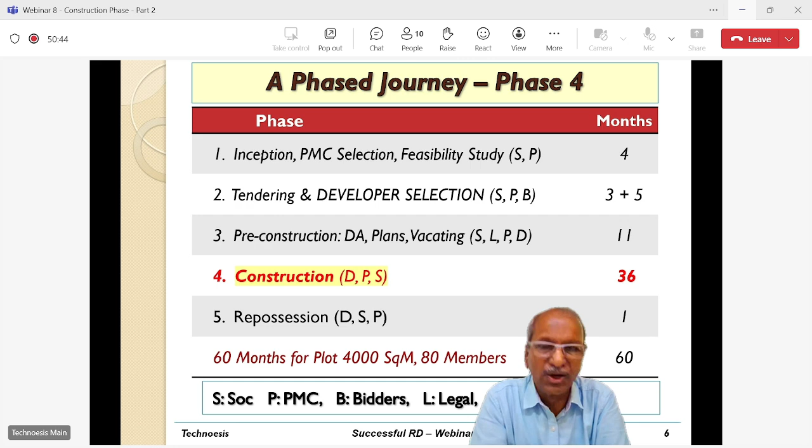When all this is happening, what is important is that documentation also has to keep pace with the construction. That is the aspect of the same construction phase which we are going to discuss today. So we are not going to discuss the action points which we covered in our last webinar, but in this one, what we are going to cover is the documentation part.

So exactly what are we going to cover in this webinar? First is daily data capture. A lot of things happen daily on the site. Typically, the way we at Technoesis provide our services during the construction phase, we have our site engineer permanently stationed at the site throughout the day. What he does is capture the construction-related data happening at the site in our own system - we will see how that is done. This happens daily - it's pure data capture of what is happening where, and in a structured manner, collected in standard forms.

Second is - this was daily - the second type of documentation is when our project coordinator visits the site once a week. When he visits, he sits with our site engineer and also with the developer's representative, especially someone aware of the happenings at the site. In that visit, our project coordinator first checks the data which has been captured by the site engineer since his last visit, then tries to relate it with the expected contractual way in which the building is being constructed, and makes sense of the data in relation to how the construction is happening.

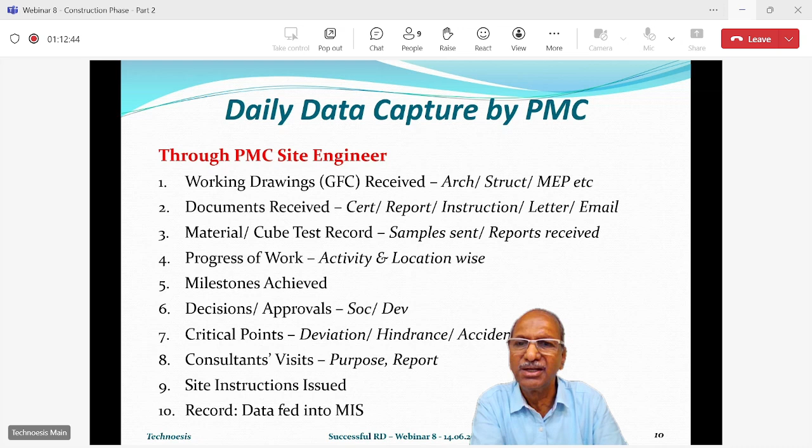Now coming to the tracking part. There's no point in just having data. We have to relate the data to the work which is happening at the site and at the same time to the contractual document. So what we do next is that using the data which is being captured every day, we relate that data to the work which is going on at the site.

So data already is there by itself. Now we are talking about analyzing the data, and connecting it with the progress at the site and the quality at the site and things like that. Now, how do you do that?

There is a project coordinator who makes a visit to the site jointly with the developer site in charge. There, data is already collected day to day. Now what they also do is, based on the data, our project coordinator will try to see if sub permits are there. For example, if CC is up to only the fifth floor, and we are now casting the fifth floor slab, then we have to really bring this up.

All of us have to discuss that if the next CC above does not come, we will not be able to continue with the construction. So this realization has to set in as early as possible - whether permits are there, whether drawings are there for the work ahead, whether there are materials available at site, whether there is sufficient manpower of the type which is required, equipment, like for example, suppose we need a tower crane at a particular stage in a project.

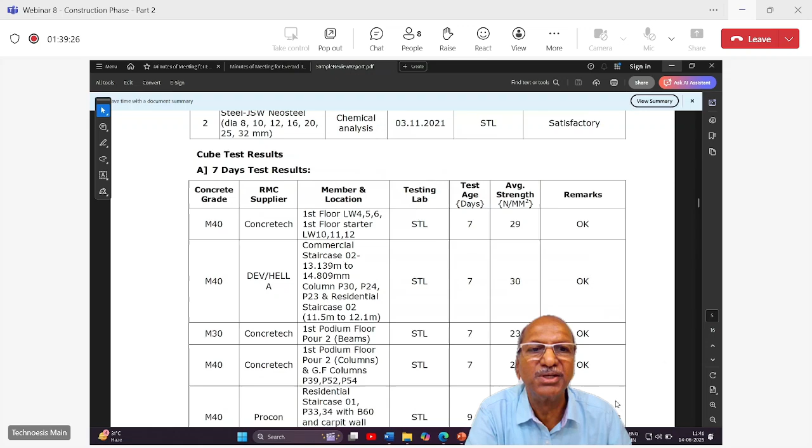Okay, so now let's see a sample review report. Slowly we'll see it.

This is a 16-page report which we give to our client, and what you are looking at is a real report. This is not fictitious. Only the name has been changed. ABC, there's no such thing as ABC Society. This is a real report, and the date is also, yeah, this is a 2021 report.

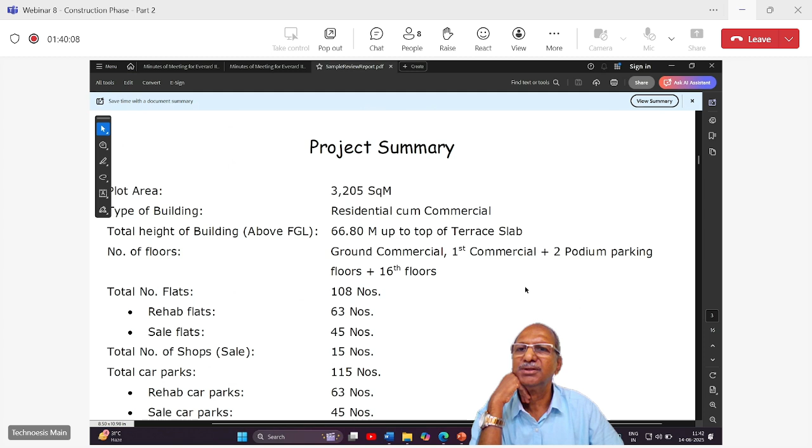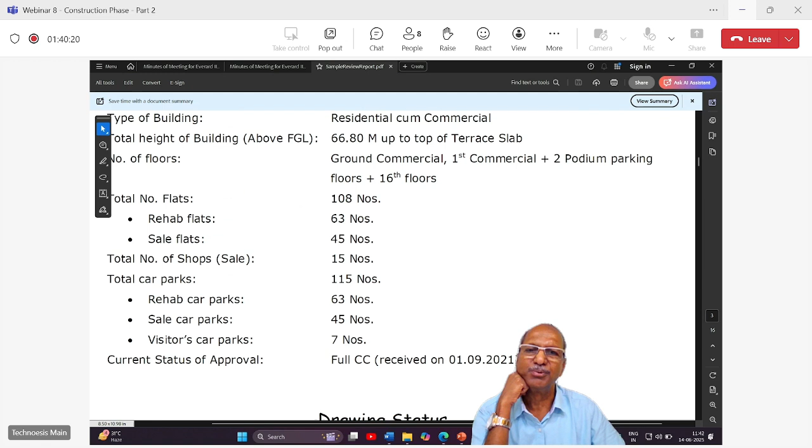So I'll show you what goes into the report. Project summary, which I told you: plot area, number of flats, type of building, number of floors, how many flats, how many sale flats, how many car parks, how many sale car parks, current status of approval, full CC received, like that.

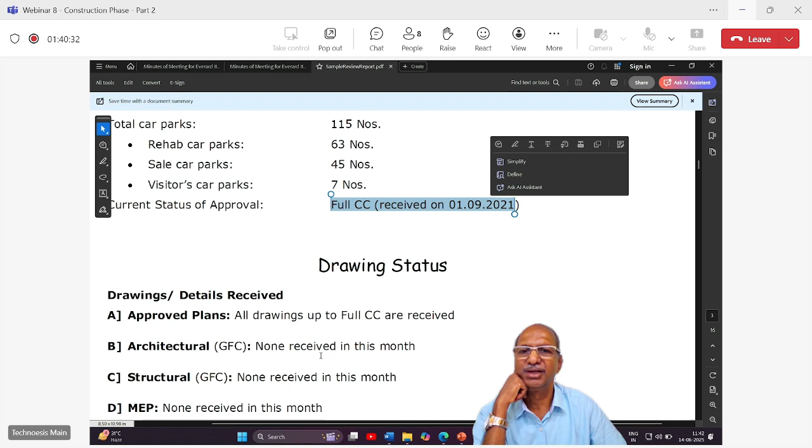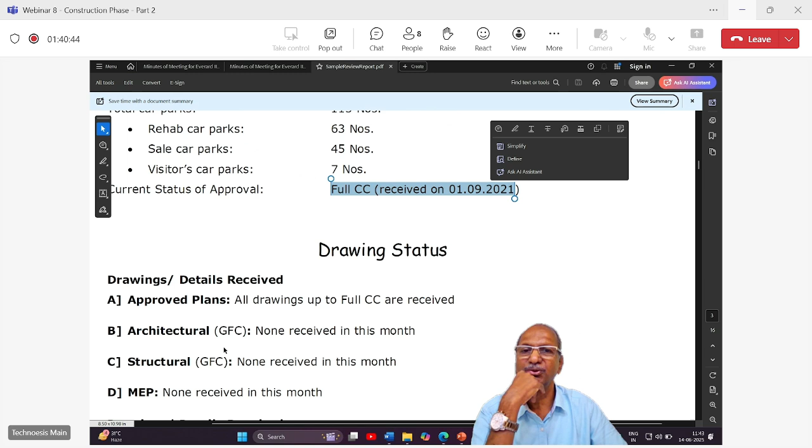Okay, drawing status. So which drawings are received, which drawings are expected, like say approved plans - all drawings up to full CC are received. Architecture none received this month. This is all about this month. Architecture none received - nothing came in this one. But drawings and details required.

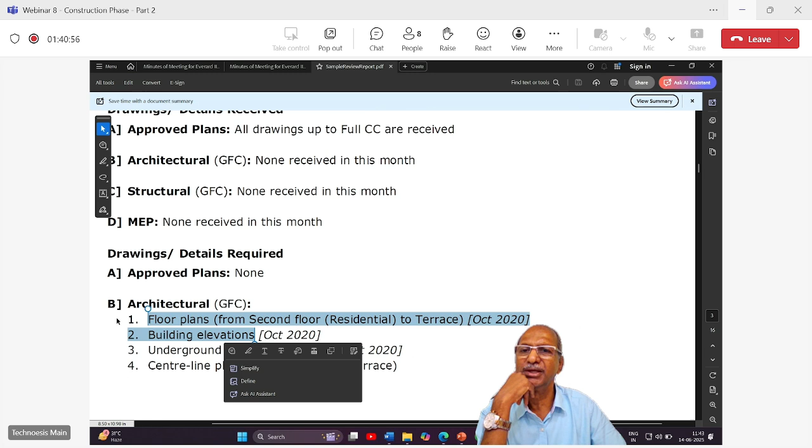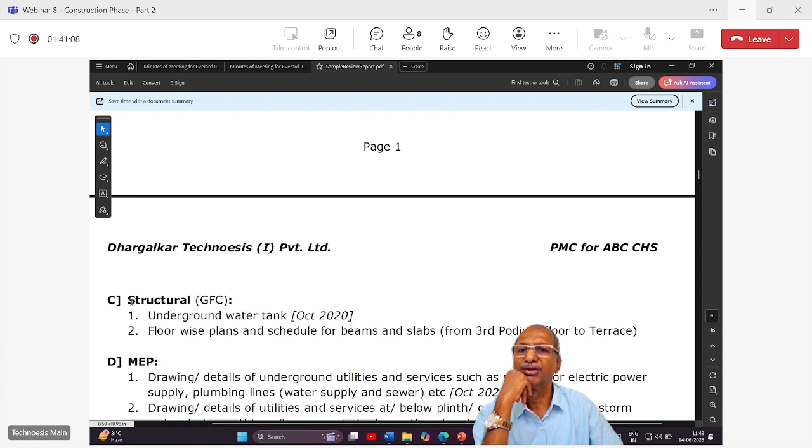Now we see approved plans, no drawing is required. But architecturally, we need so many plans and drawings for the site. So this is identified in the report - these drawings are required, otherwise your progress will be affected. Structural drawings - these drawings are required. MEP drawings - we see how many drawings are required in MEP. So we specifically tell them which drawing is needed. This kind of follow-up is required, then only the drawings will come in time.

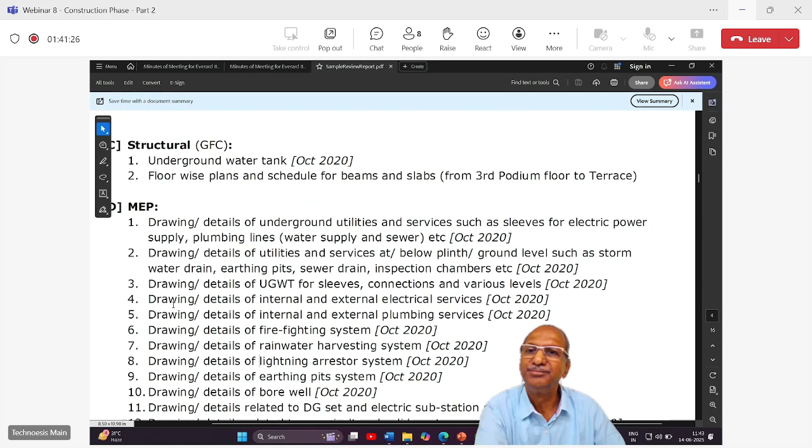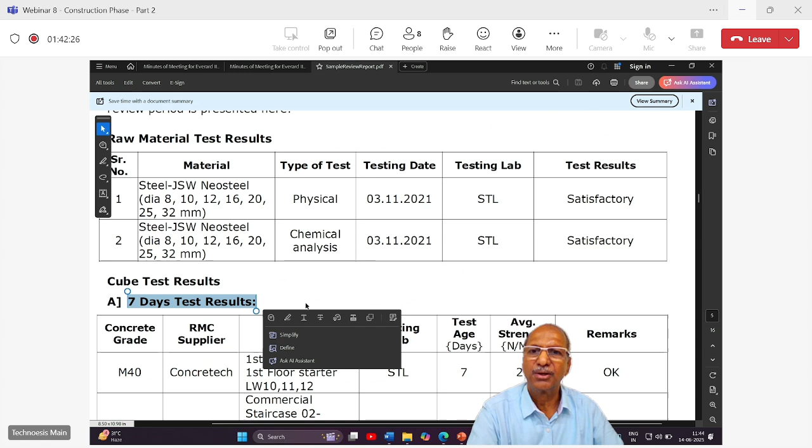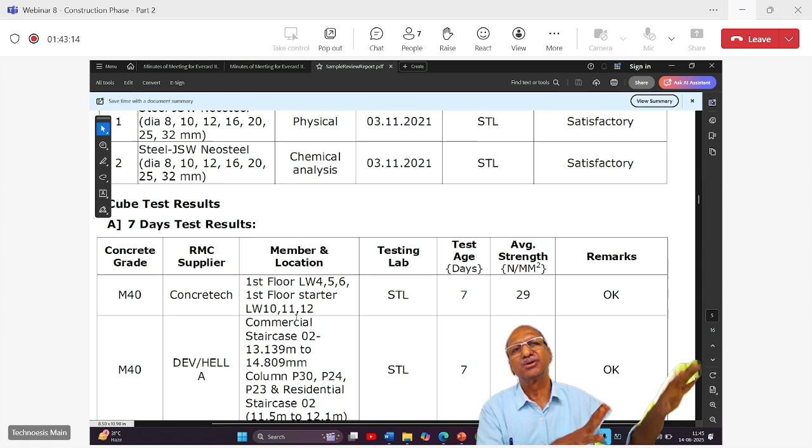Now where was that concrete used? Can you see? This is very important. M40 concrete was used on first floor LW, lift wall, first floor starter, LW. So you know exactly where that concrete was used. Why is this important? Because if the cube fails, then you know where the faulty concrete has gone and you can think about rectification. If you just cast the cube and kept it without knowing where it's from, testing it only tells you if the cube is good or not, but knowing where that cube's concrete went is very important information. You can see here member and location - we always write this, where it has gone.

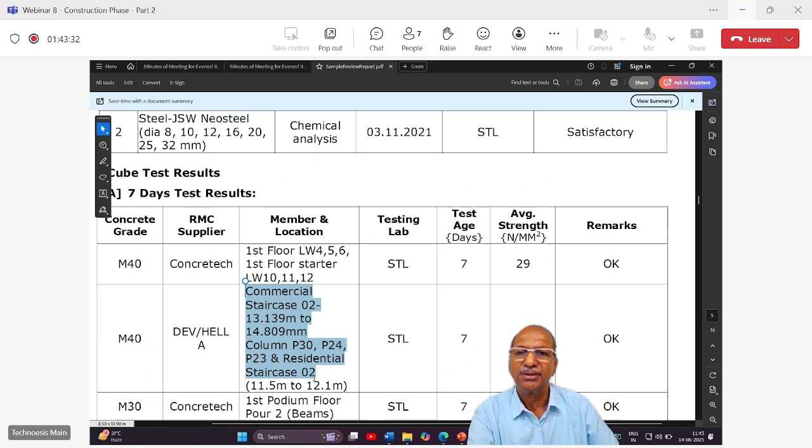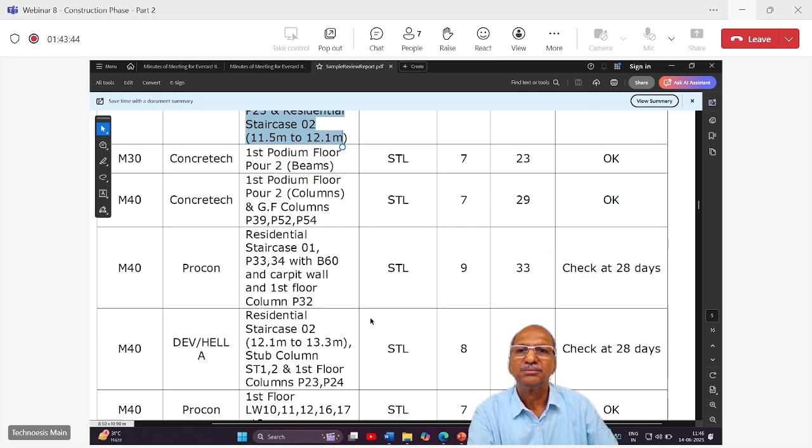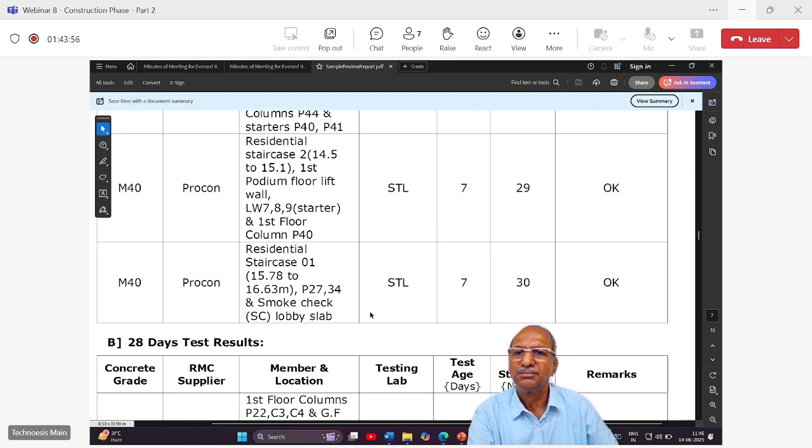You can see here everywhere. Okay, this is the concrete 7 days cube test. This is still 7 days. Yeah, and now there's another record - this is for 1 month. What is happening, 28 days test results, something similar to that.

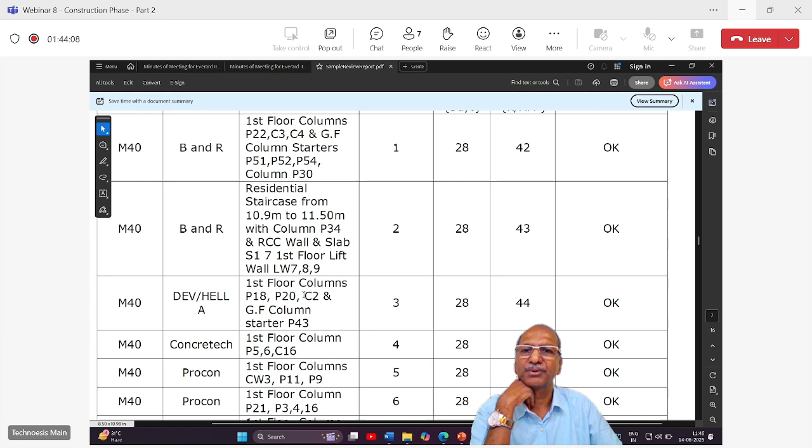Okay, and then about cubes remarks etc., which are now in progress review. We have seen the quality report. Now let's see progress review.

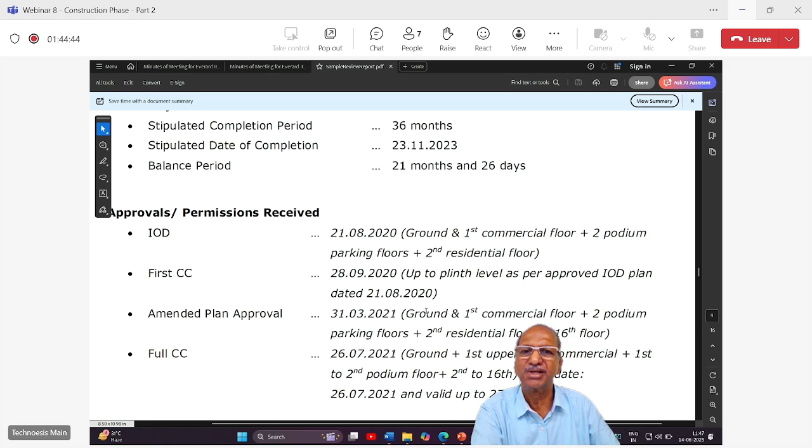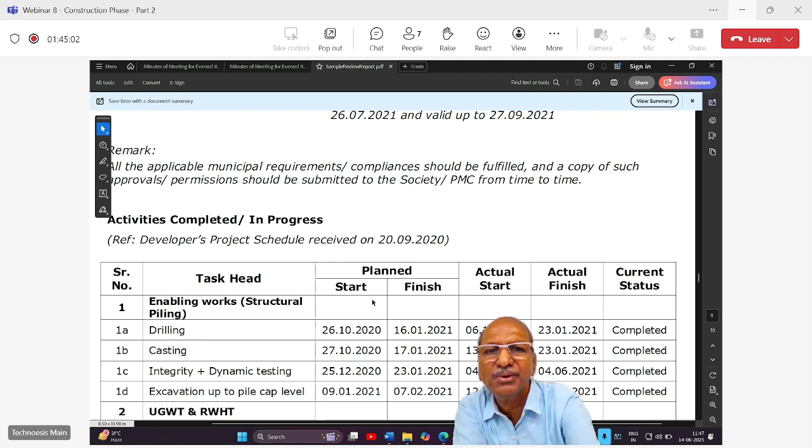Now project period, date of letter of intent, project commencement date, stipulated completion period 36 months, stipulated date of completion 23/11/23, balance period - all that has been written as of that month. Then approvals and permissions which are received. Now see what I told you about activities completed or in progress in that month. So you see task head, which task, when is it planned, meaning when was it supposed to start, when was it supposed to get over.

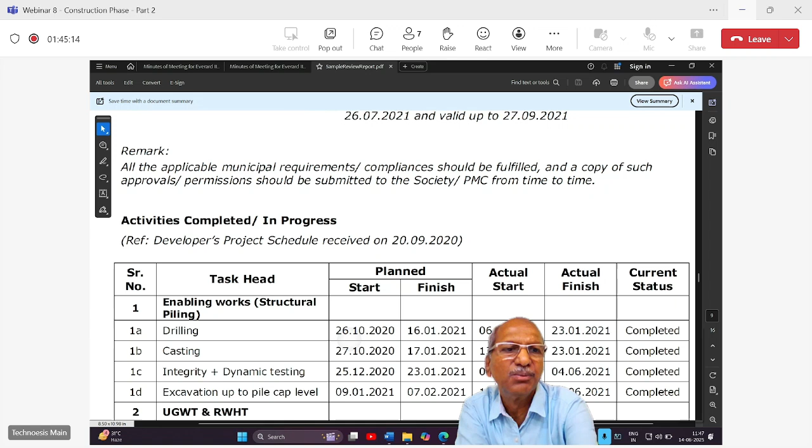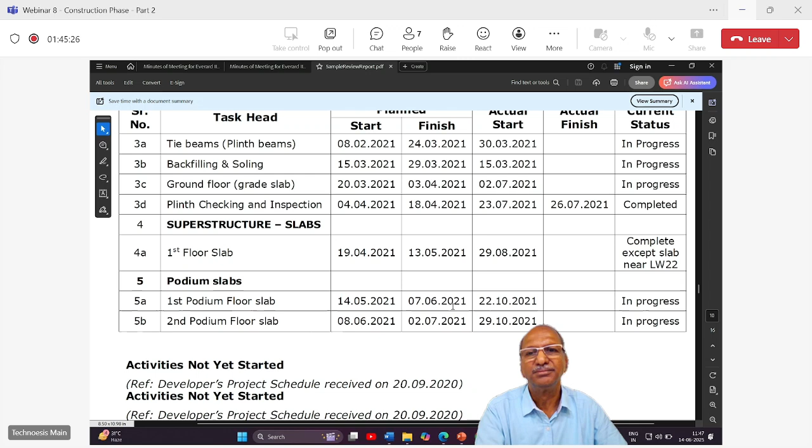Then when did it actually start, and when did it actually finish, and what is the current status. This is done for each activity. You can see it here, each activity up to that month. And you can also see here activities not yet started.

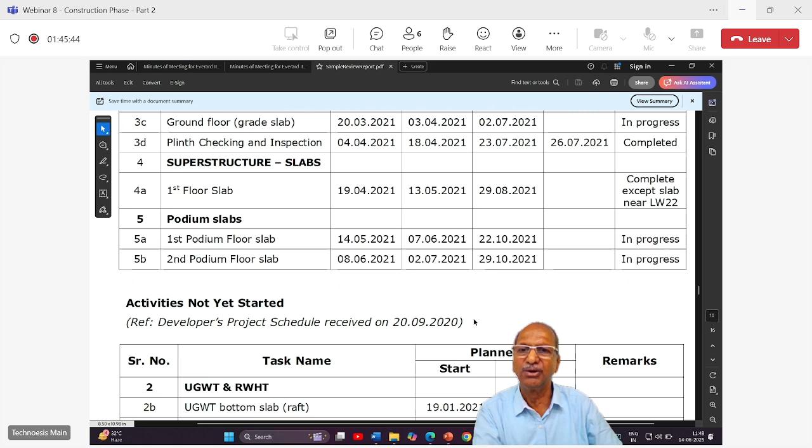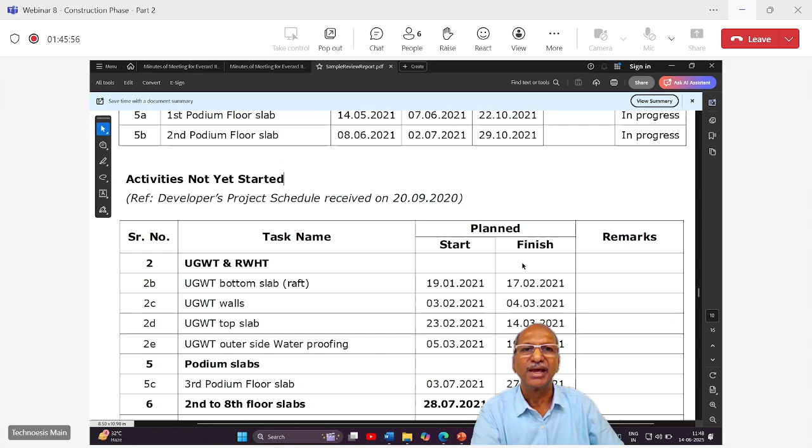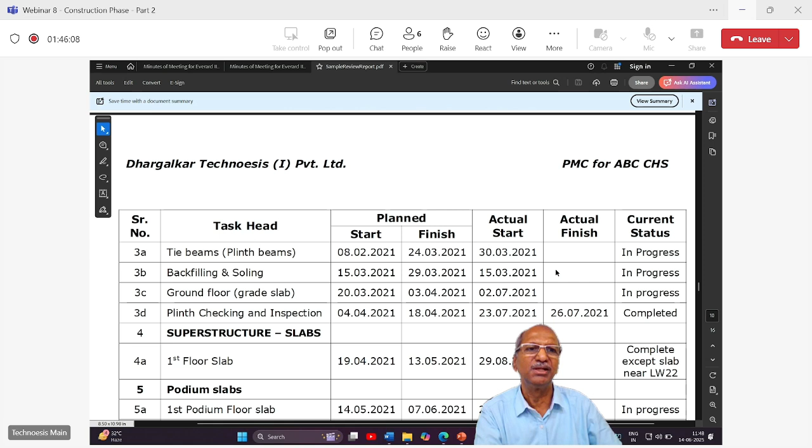Meaning which ones? Those activities which were supposed to be started in this period - not future ones, but those that were supposed to happen or should have happened this month, but they have not happened. So which are the activities? There's planned start and planned finish, but the work hasn't happened at all because the activity has not started - so there is no actual start and actual finish. Now you can see some activities here where it has started but not finished - meaning they have just started but are still in progress, as written here. And some completed activities where you can see the activity is completed.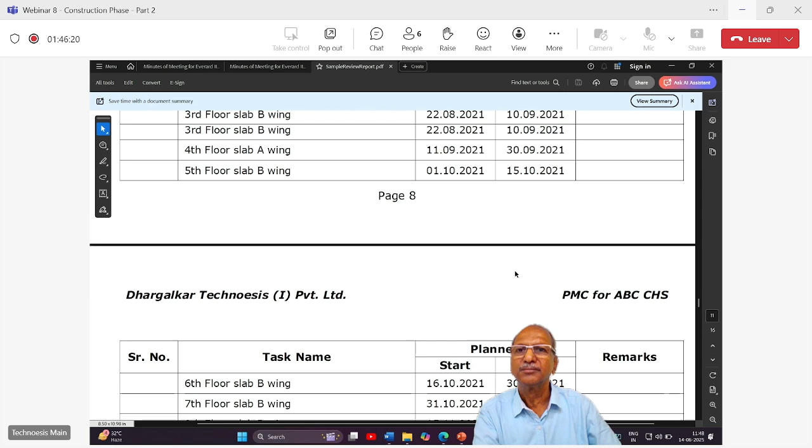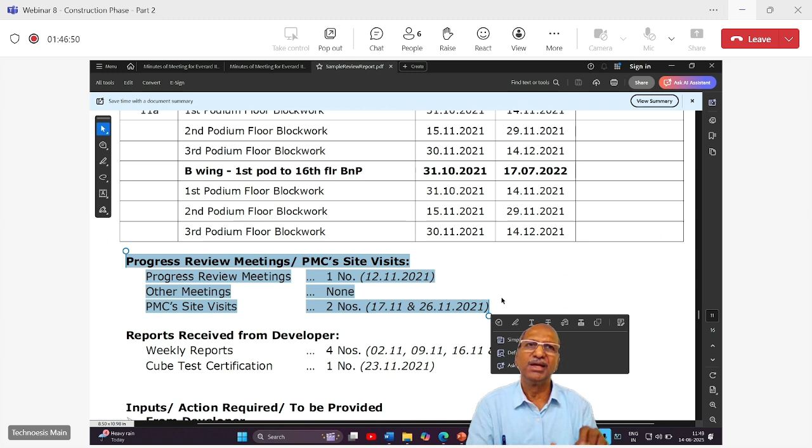So which are the progress review meetings and PMC site visits, and what dates did they happen on? The meeting's minutes of meeting is a separate record, and the PMC site visit's site visit report is a separate record. The monthly report only makes a mention that this many meetings happened, this many reports happened. If you want detail, look at the minutes of meeting or the site visit report.

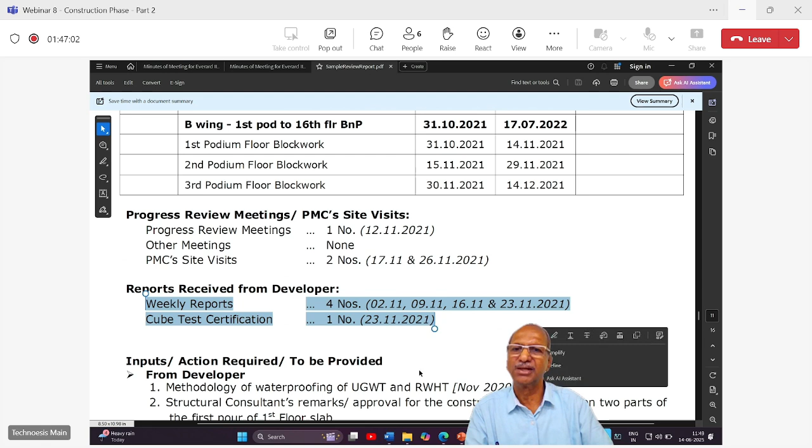We also take reports from developers, weekly reports, so there is a mention of that also, and input and action required or to be provided. What is required from the developer, and then from society, what decisions are required.

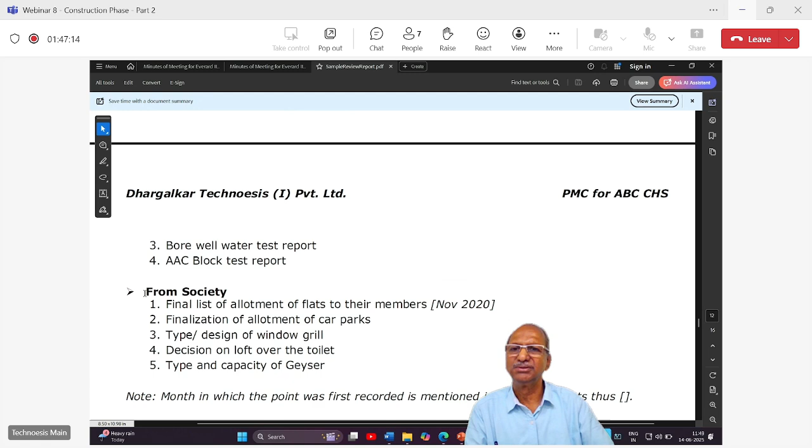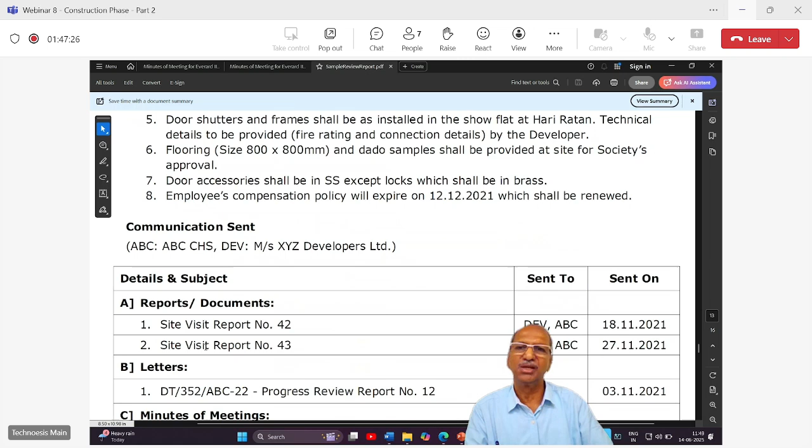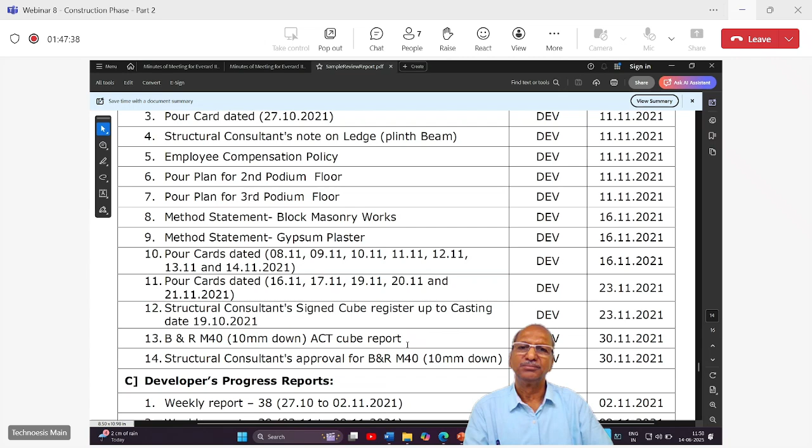Then important decisions and discussions - what decisions happened, what communications happened, which email, who wrote an email to whom. All this data we capture, communication received meaning emails received. Okay, reports can be more complex also, no?

So what I am showing you is only a 16-page report. Sometimes the reports can be - as and when materials get approved, you approved the tiles, you approved the doors, you approved the light fitting in the society - all that, as and when things get approved, an approved list comes in below, which can also be a very long thing. Why do we want the approved list to be there?

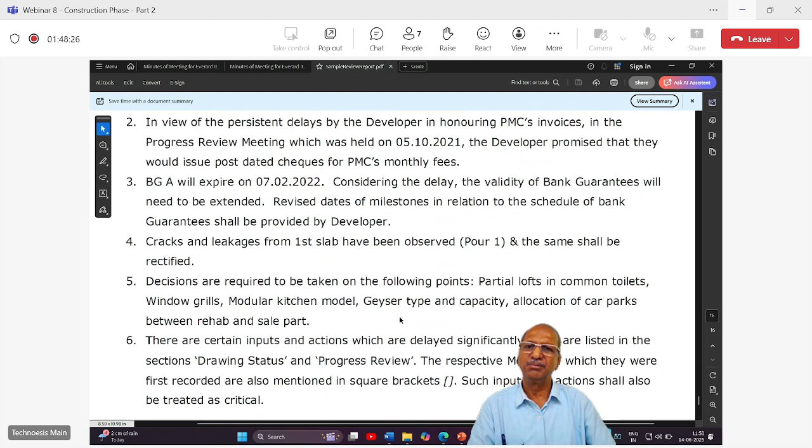So that everyone knows exactly what needs to be installed there. It shouldn't happen that someone says we approved this tile, but you installed something else. So once approval happens, that will be mentioned in the report. And then finally the critical remarks if there is a delay and everything, all this.

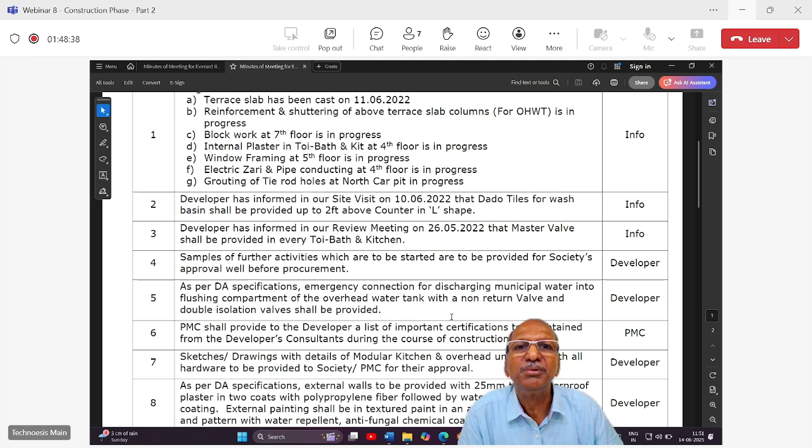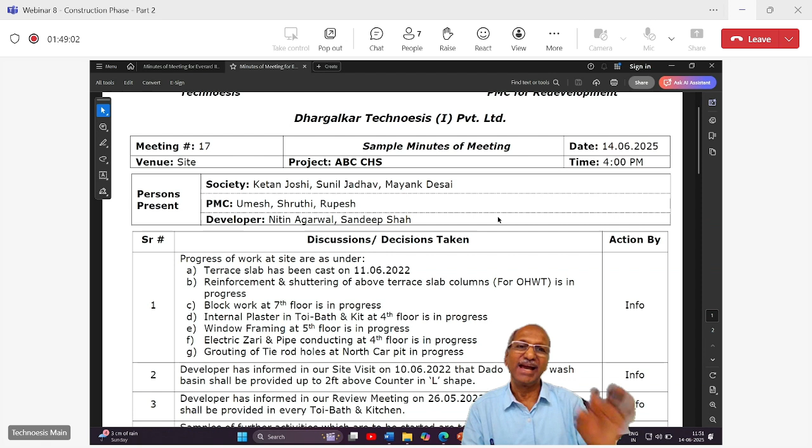So what you have just seen is current. Okay, then let me see what this is - yes, sample minutes of meeting. We saw that every month we'll have a monthly meeting, so there is a representation from society, from PMC and developer. The names, of course, except for ours, are all fictitious names. So the meeting number and all this is actual minutes of meeting - I'm not showing you some fabricated thing.

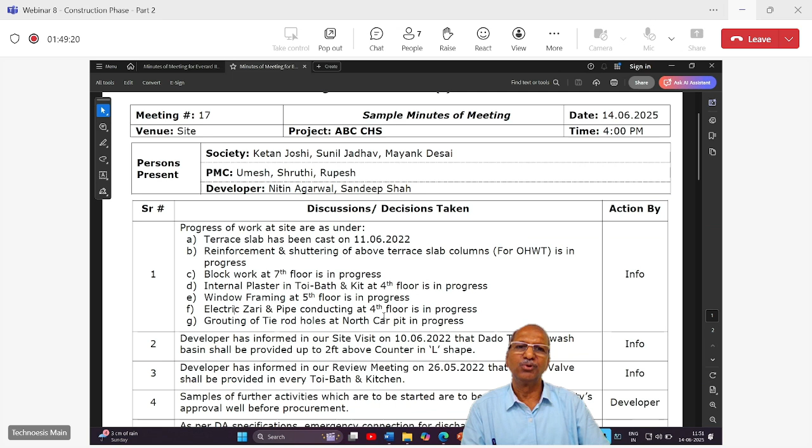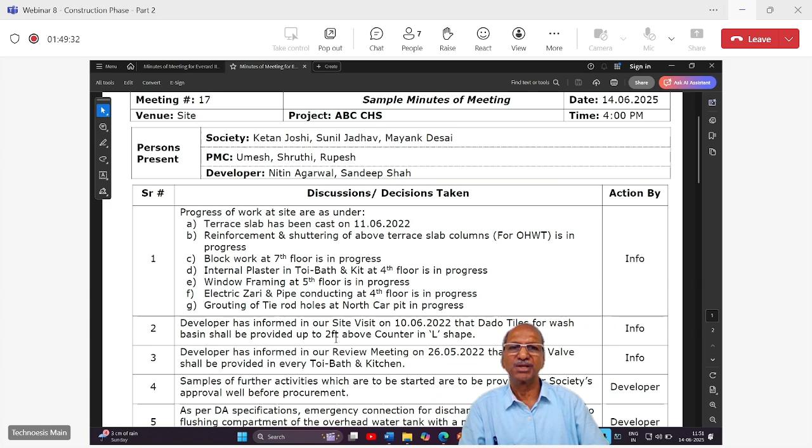So you see in minutes of meeting what we do - we take the progress of work, whose work has happened, that this is. See, it's also written - electric wiring and pipe conducting at fourth floor is in progress, grouting of tie rod holes - this much small detail we write. Then the developer has informed in visit that dado tiles for wash basin shall be provided up to 2 feet above counter. So certain decisions are taken in this meeting.

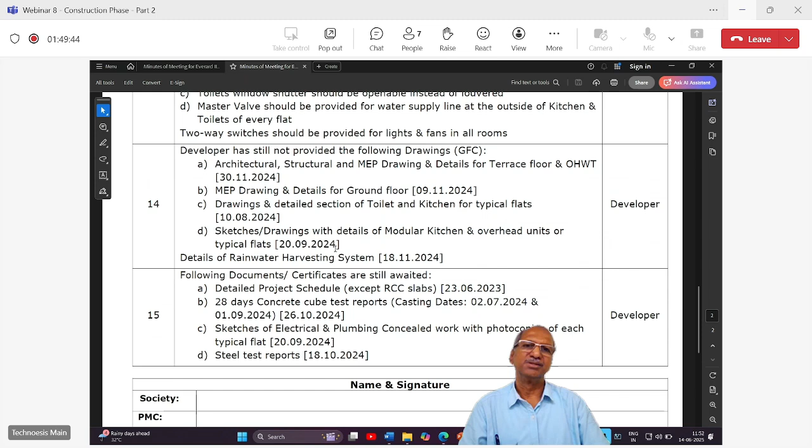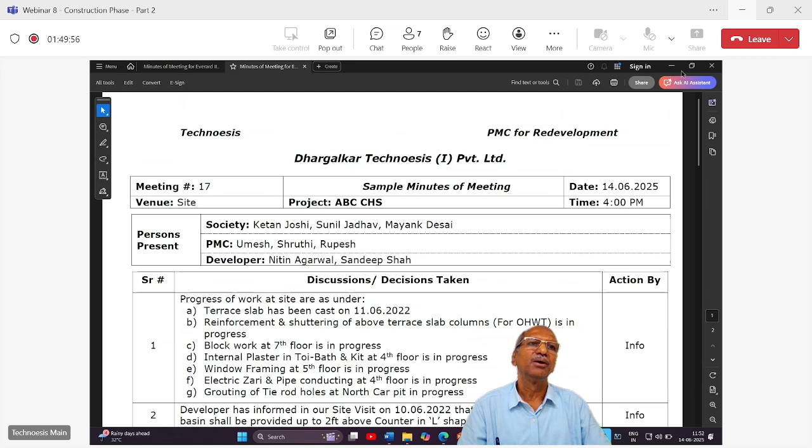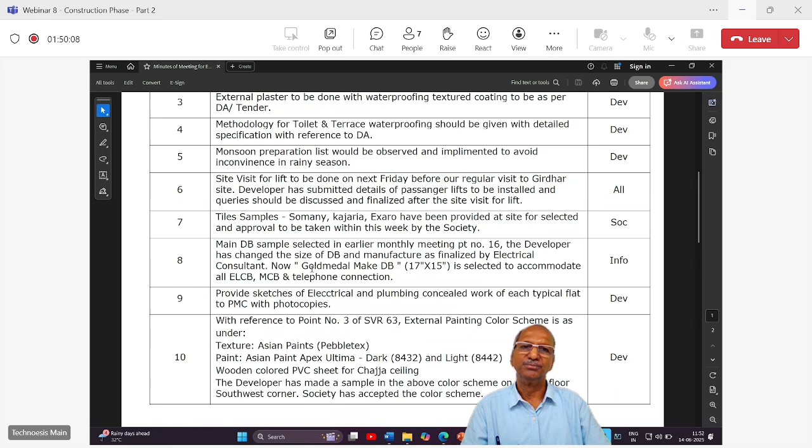This is all a real meeting going up to say 14, 15, 16 pages, 15 points. And again, as I said, these minutes go and sit in our management MIS. So this is your minutes of meeting. And I hope there is one - yes, this is a sample site visit report, which I told you we do every week.

So now we are almost at the end of this webinar. Since there is some 5-10 minutes left, I would like to show you a project tracker, the project tracker system which we use.

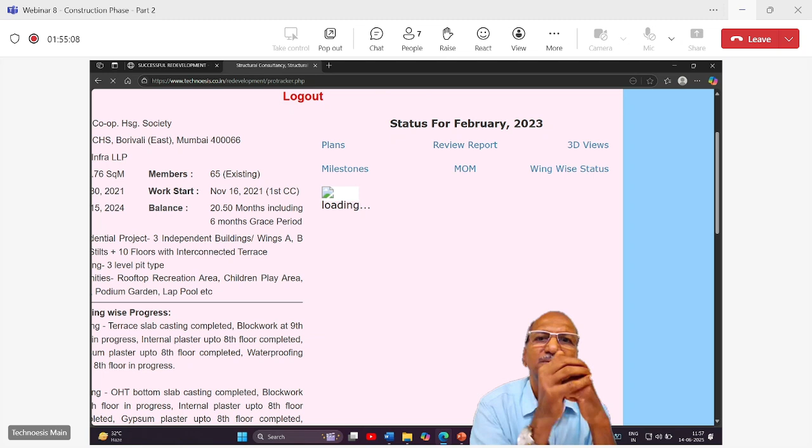What you see here says 'Redevelopment of ABC Cooperative Housing Society Limited' - ABC is obviously a fictitious name. First you see brief summary information, and then some photographs - current photographs for that month. This is updated once every month, not every day, whereas our professional work of updating data happens every day. But when we distribute information for transparency to your members, this update is done once every month.

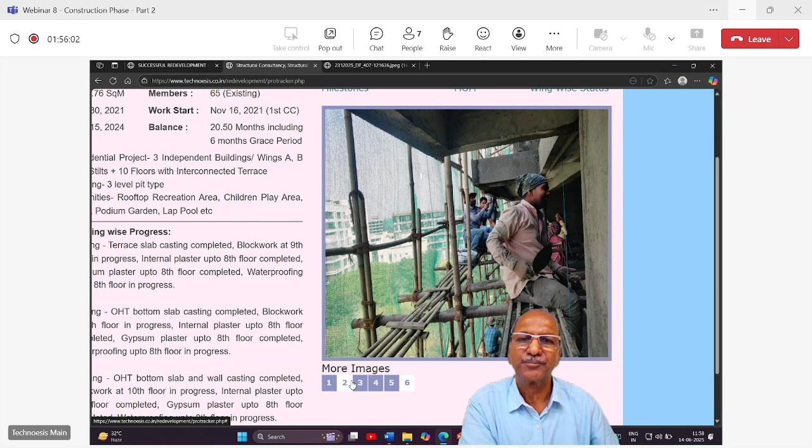You can see the current photographs here. If I click on that, I'll be able to see that photograph bigger. Okay, this is the second photograph. You can go on like this.

In addition, you see these 6 links here: plans, milestones, review report, minutes of meeting, 3D views, and wing-wise status - meaning if there are 3 wings, then wing-wise status for each. The review report I already showed you, and if I click on that, a similar report opens. Minutes of meeting I also showed you. Milestones I haven't shown you yet, so let me show you that.

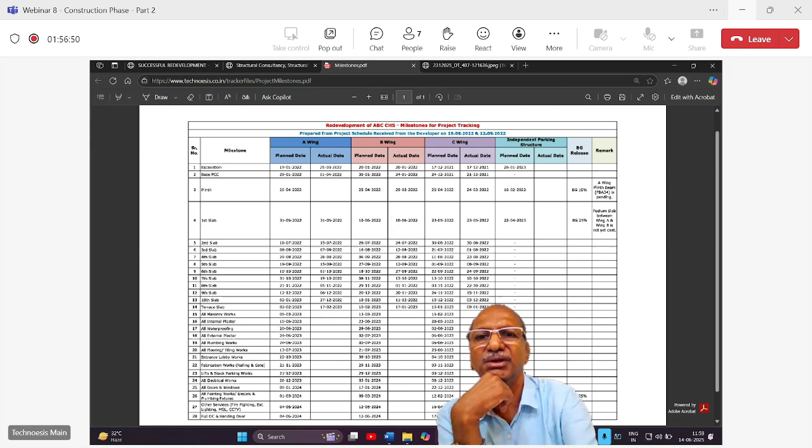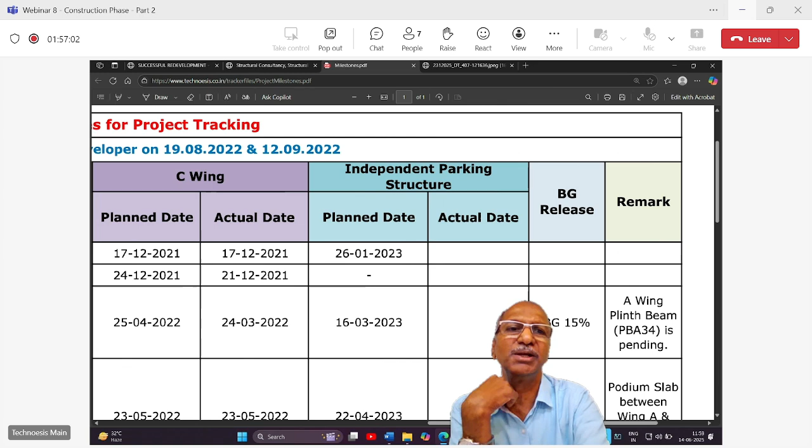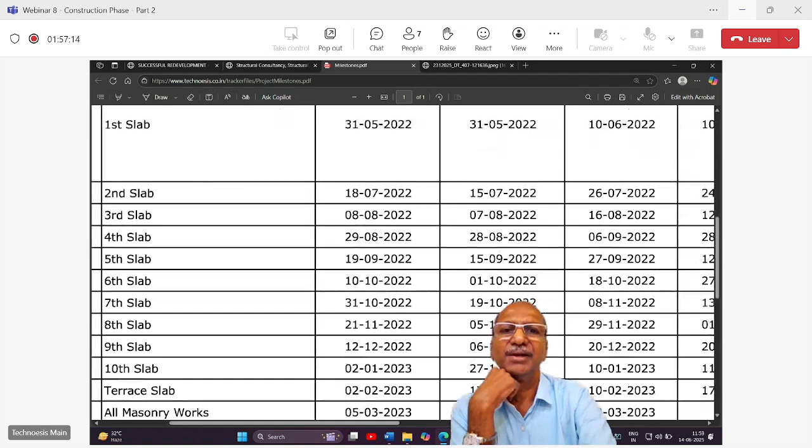Now you can see the very minute details. There are about 28 milestones identified for A wing, B wing, C wing, and independent parking - actually 4 structures total. You can see milestones here: excavation, base PCC, plinth, first slab, external plaster, and so on - all with planned date and actual date to achieve that milestone.

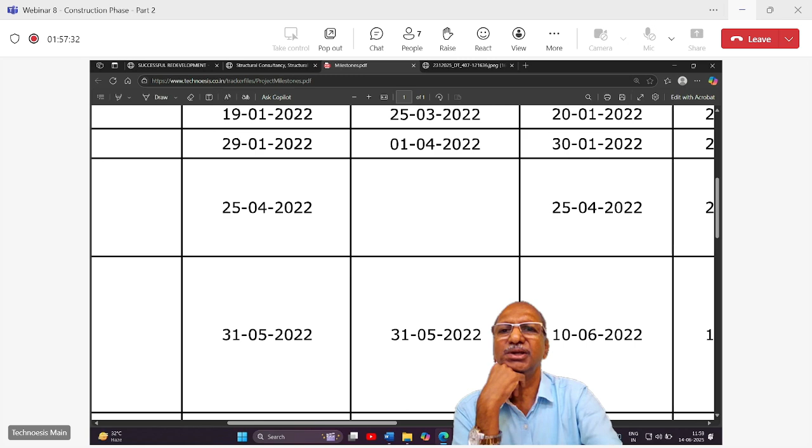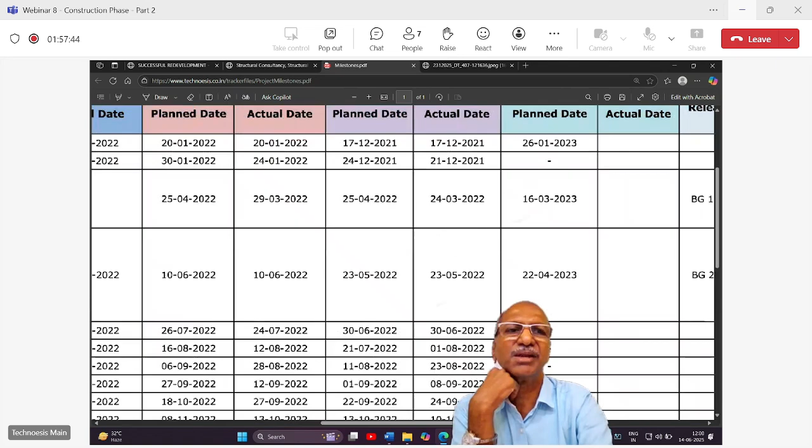So there's planned date and actual date - when the milestone was achieved. It's not a start date. You can see here number 3 - this milestone has not yet been achieved, so that's why the actual date isn't filled in. So as a member, you can understand which milestones have been achieved.

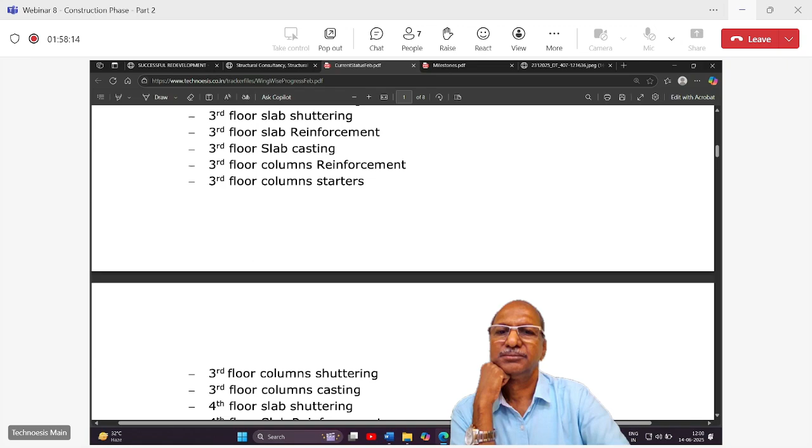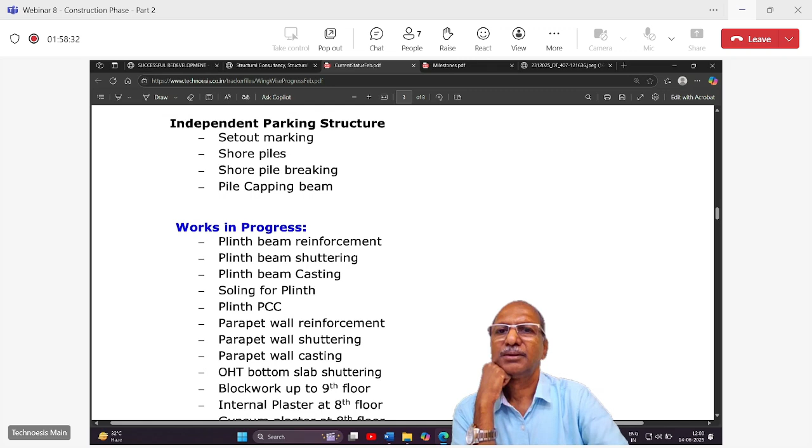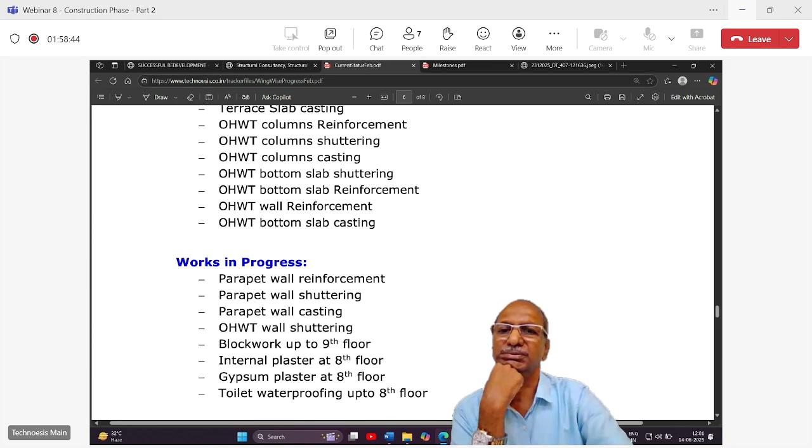So much work has been completed - works completed, you can see here. Works in progress for wing A - works completed, works in progress, when completed, and all that detail is there in our progress report. Wing C - works completed, work in progress.

And if you want to see the 3D views - as we do, we also put our project plans into this system. So it's like when you have a mobile in your pocket, you also have your project plans in your pocket. I'll show you the plans.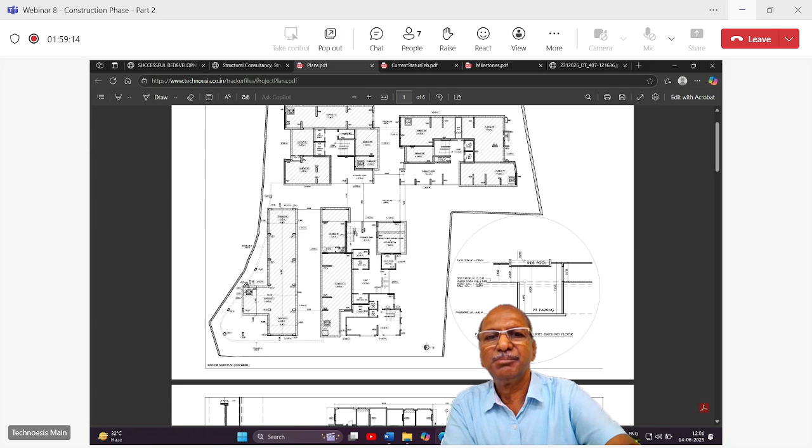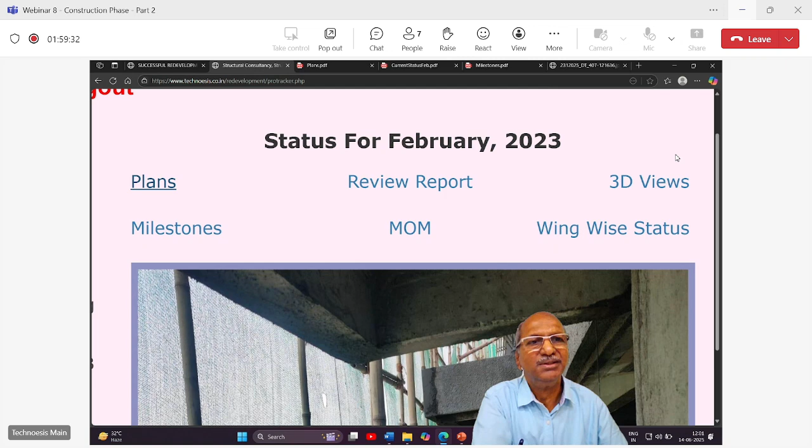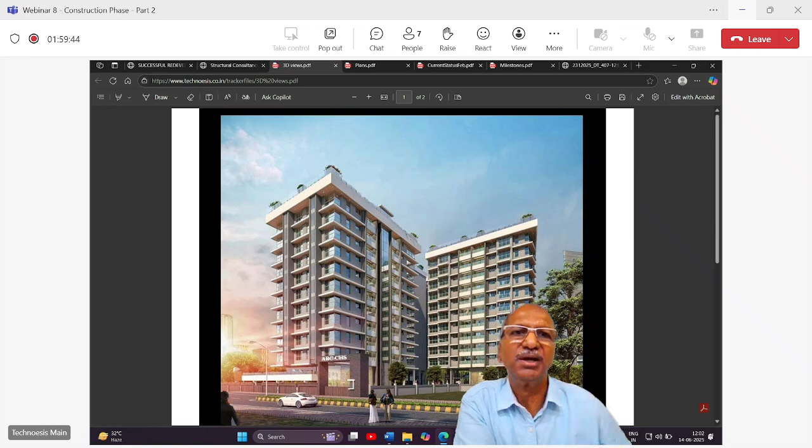Samples here, see. And if you want to see the 3D view - suppose you go meet a friend and they ask how your building is going to look. You don't have to say the plan is stuck at home and you don't have it with you. There's a website, you can log in here and show the 3D views if we have included them.

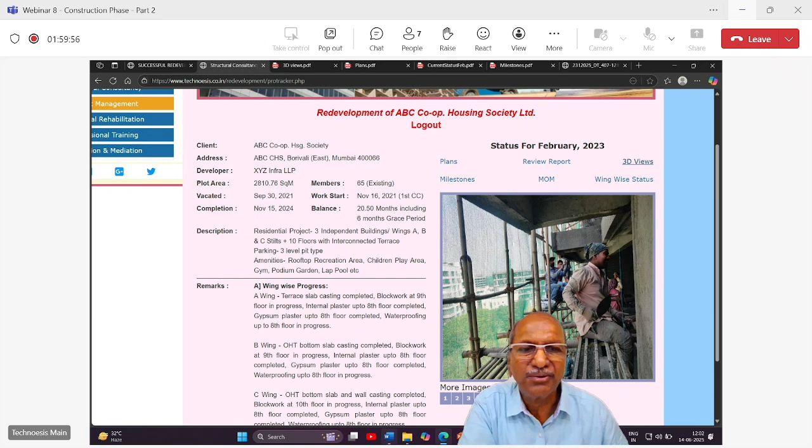So the point is, we have these 6 links here and all this is available on our website as a project tracker system. I think I have finished this presentation. Thank you very much.